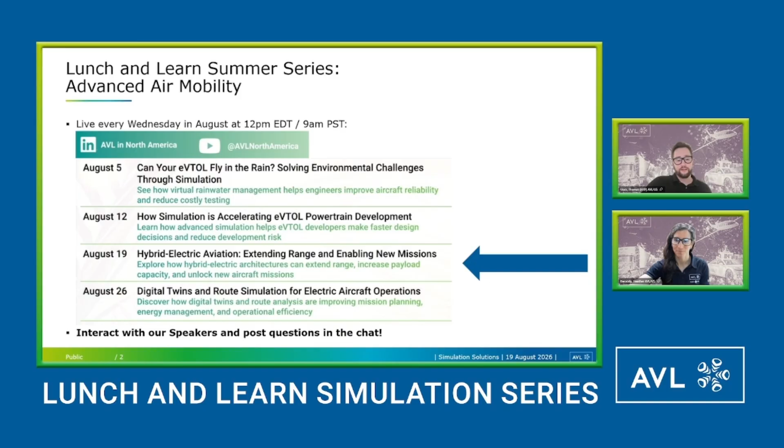When we look into a battery electric aircraft, we put some numbers on the screen. We did some simulations on a mission range study with an aircraft of approximately 3,000 kilograms, with the assumption of having 1,000 kilograms of battery, about a third of the aircraft mass. We can achieve a 30-minute mission with 250 kilowatt hours installed, 160 kilowatt hours usable, to have some spare range for emergencies available.

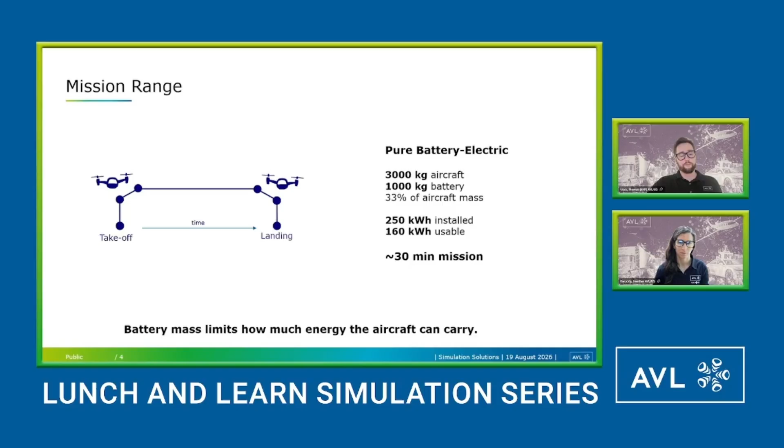And truly the battery limits the range of the electric aircraft, and the battery mass limits how much energy we have available to achieve our mission duration, but also range. So what would happen if we wanted to increase the range? One might say simply, okay, we add more batteries. If we look at this case study, what happens if we increase the battery amount in the aircraft without changing too much else, keeping the architecture intact?

If we hypothetically add 400 kilograms of additional battery, about 40% more battery mass, we can increase the flight duration to 45 minutes. But you might be able to spot the big caveat here. We would only have 100 kilograms of payload left, and that's basically the weight of the pilot. We have no room for cargo or passengers, so obviously this is not going to work very well in practice.

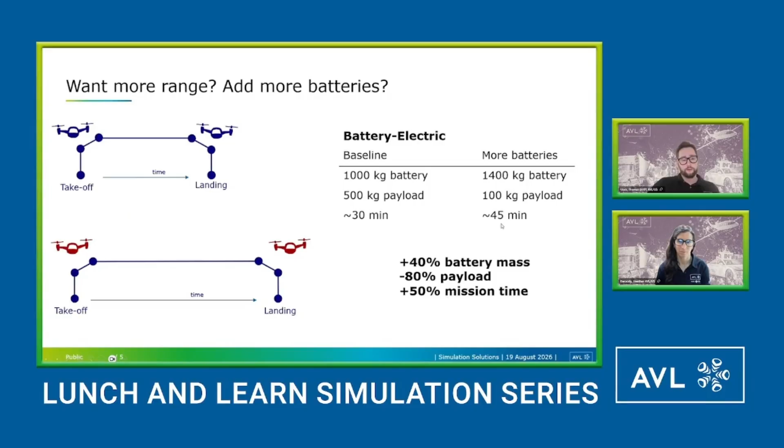So what if we use a hybrid instead to increase our range? Let's assume we shrink the battery down to 200 kilograms. We instead use a range extender, for example, and fuel for that range extender, which might have a mass of approximately 500 kilograms. It still leaves us 500 kilograms for payload, same as the original battery electric aircraft. But this combination would be able to achieve a 200-minute mission.

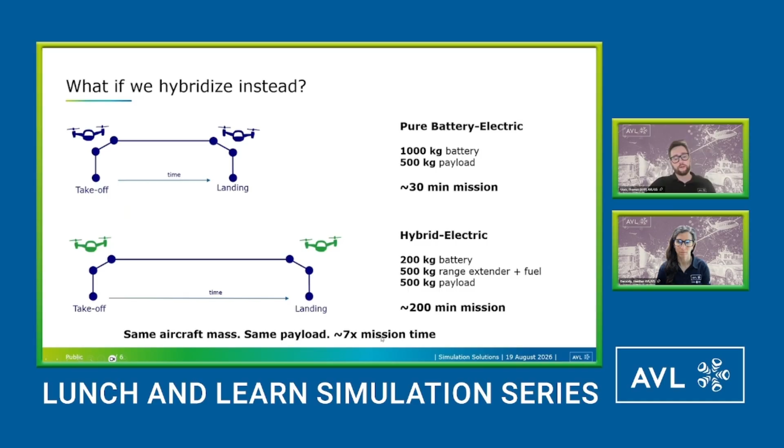So about 7 times more mission time with the same payload, with the same aircraft, basically with the only drawback of adding more complexity to the powertrain system. It will be a more complex system, maybe a more costly development, more parts, but at the same time, this increased capability might benefit you.

So how can we achieve the different powertrain or hybridization concepts? Starting with the all-electric aircraft, we see a schematic where at the center of the aircraft we have the energy storage system, aka the battery in non-aviation terms. The ESS powers the e-motor. The e-motor goes mechanically, the green line, to a propeller shaft, and the propeller or fan, and also powers consumers on board.

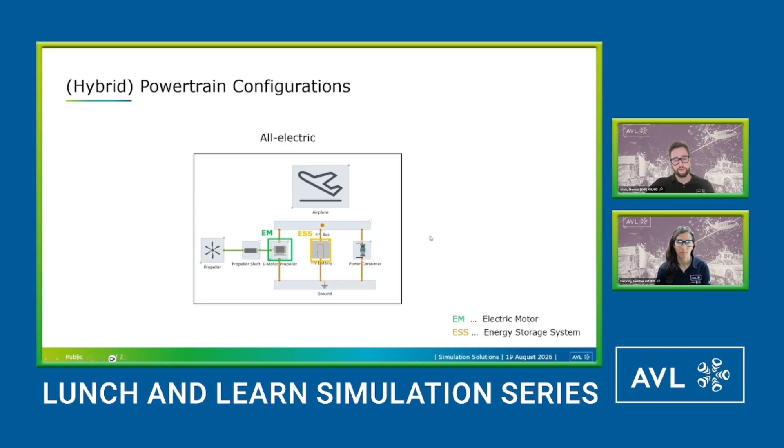Now, if we would like to extend the system and achieve a hybrid configuration, we have a bunch of different options. One ICE-based option might be that we simply add an engine and an electric motor, both mechanically connected to the shaft, mixed through a gearbox, and if it's a true hybrid, both can power the propeller independently.

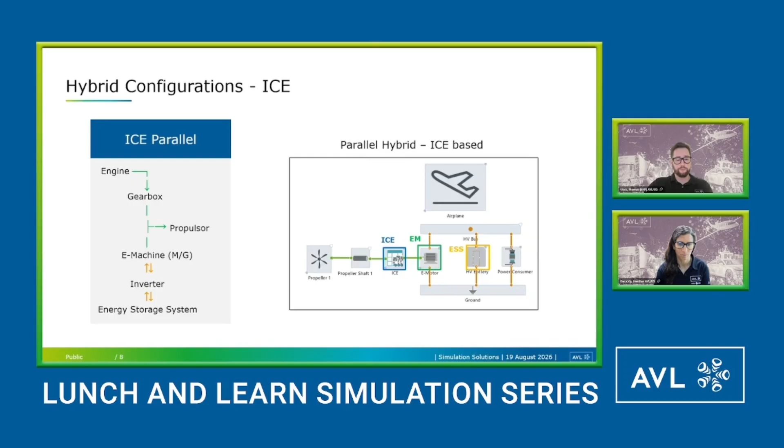Now we could also switch to a series hybrid. The previous one was a parallel hybrid, so both can actually power the aircraft. With the series hybrid, only the electric motor will power the propeller or the fans in the end. And we have different variants of how we could achieve this.

One example would be a fuel cell system that generates the necessary energy, stores it in the energy storage system, the battery, and the system is mechanically disconnected from the e-motor or the propeller, and just electrically powers the e-motor. One might also think, depending on the size of the energy storage system, that this is kind of like a range extender. So the fuel cell system extends the range of the battery, which might be rather small or could potentially be on the larger side.

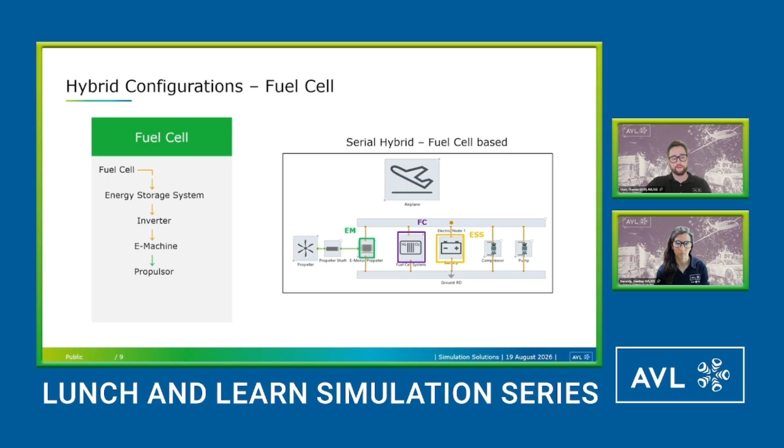So depending on what the use case is. And this can also be achieved with an internal combustion engine or a conventional combustion engine, a turbine potentially as well, where the ICE acts as a range extender. And since the ICE, unlike a fuel cell, doesn't create electric power out of the box, it needs to be paired with a generator. The generator is creating the electricity that's stored in the battery, and then this is powering the electric motors.

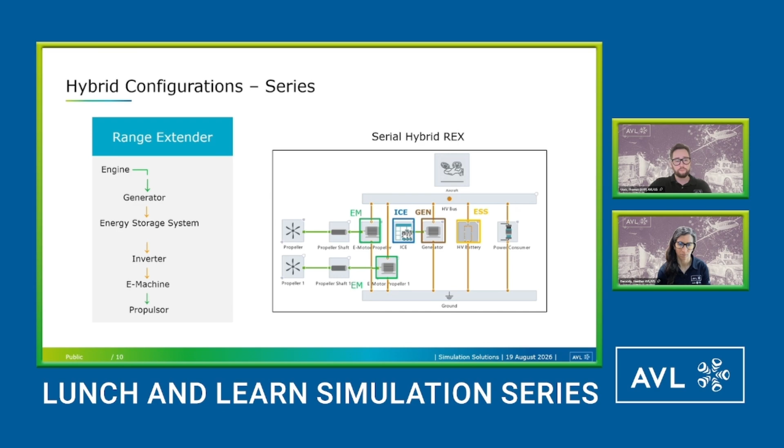But this is not the end of the story. There are even more potential variants. There could be mixed variants, a mixed style hybrid where we would have electric powered propellers, but also a main propeller, for example, that's always ICE powered and that also powers the generator. So here's a layout for such a mixed system.

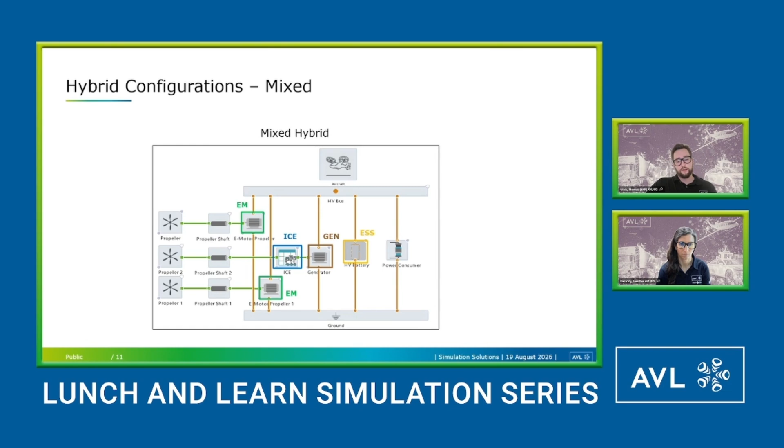And it becomes even more complex when we move on from a conventional aircraft to eVTOL applications, drone applications, advanced air mobility, so to say, where we not only consider basically one dimension, but we might also have the vertical takeoff aspect of it. And again, this really multiplies the potential variants. So we could look at coupled and decoupled systems.

Coupled, basically everything depends on one energy storage system, or decoupled, where, for example, the vertical takeoff e-motors are powered by the battery, and the horizontal propulsion is powered by, for example, a conventional ICE device, let's say it like this. And similarly, we could do parallel hybrid architectures, again vertical and horizontal, for example.

And one can already imagine that the number of potential useful designs multiplies. So that's really a challenging engineering problem, a nice engineering problem to have, and a very nice engineering problem to solve with the help of simulation.

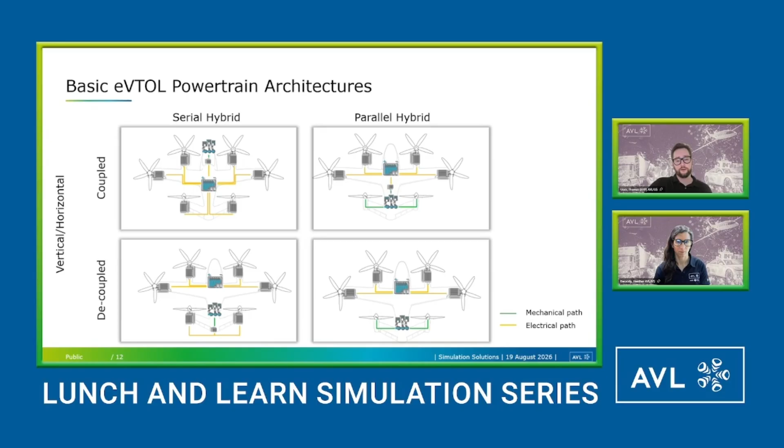To tackle this, what we are doing mainly at that stage of the development is we set up a system simulation model. You see here on the left side a sketch of how we would model the architecture. In this case, it's a cargo drone that we modeled here, a quadcopter layout, to give you an example of such an architecture.

We have to consider the different physical domains. We see in orange here the electric network. We see control functions around here, because we obviously need the control functions, and it's also quite important to have a proper mission definition of the flight route included here.

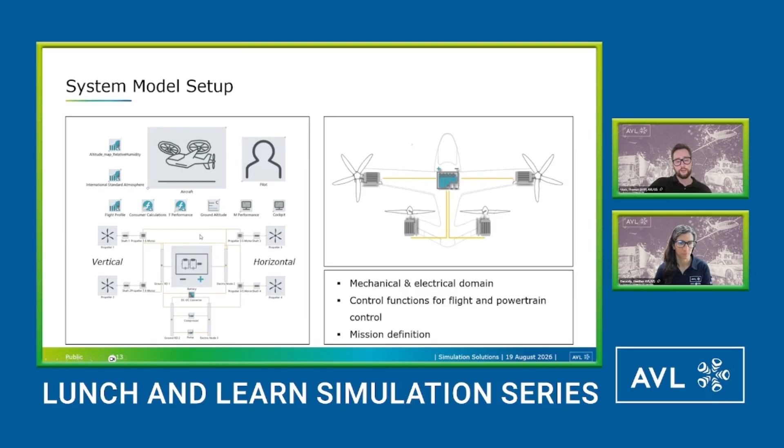And this allows us to run studies like this, as you see here, where we have a flight profile based on altitude and velocity, and the aircraft would simulate this flight route accordingly, and we see live trade-offs of energy flows and power flows, as well as the thermal aspects of the aircraft. Because especially with hybridization and electrification, the components are highly dependent on temperature.

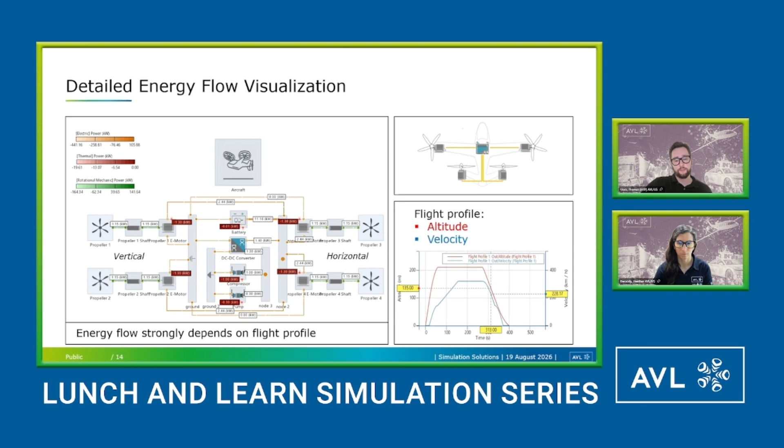The battery's power and capabilities are highly dependent on the temperature. Same goes for fuel cells, which need very defined temperature conditions, and the efficiencies of e-motors and other power electronics components depend on temperature as well. So even for such a simple layout compared to the more complex hybrid powertrains we saw earlier, this multi-domain aspect is very important, and therefore we typically run even these simple systems as a multi-domain type of simulation.

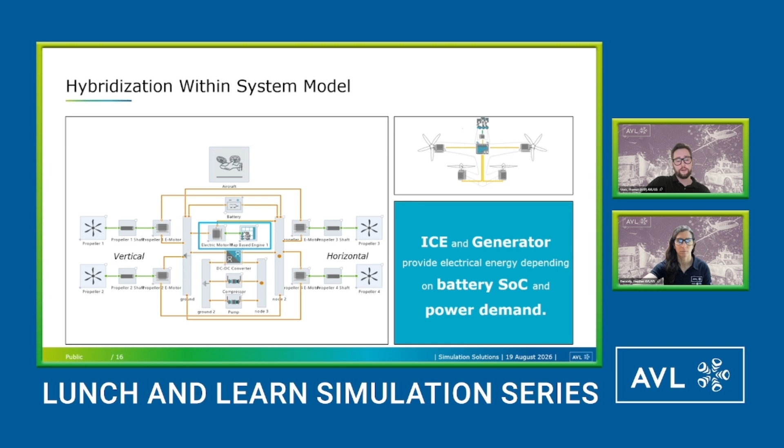Now, to give you an example, because today we speak specifically about hybrids, if we extend this model with an internal combustion engine and the generator, as you see on the sketch here, it makes the operation of the aircraft much more interesting, as we now need to balance when the ICE is kicking in, when the battery is empty, when it is charging again, and how the thermal management system is behaving.

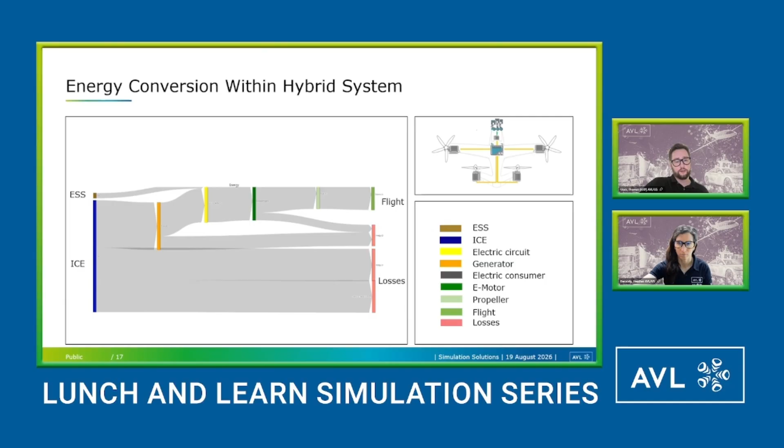And the simulation allows us, again live during the run or afterwards, to analyze the different energy conversions within the system, and in the long run optimize the operating strategy of the entire hybrid system.

But to give you a real, let's say, practical insight, much better than the slides I showed here, Heather has prepared an actual example of a fuel cell electric aircraft, and I would hand over the screen to you.

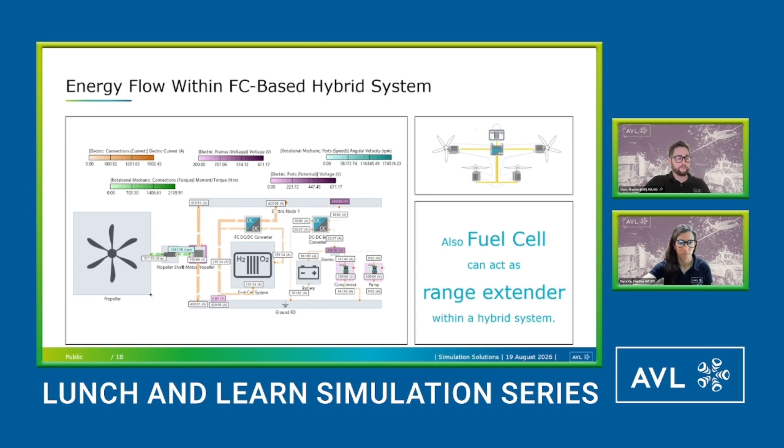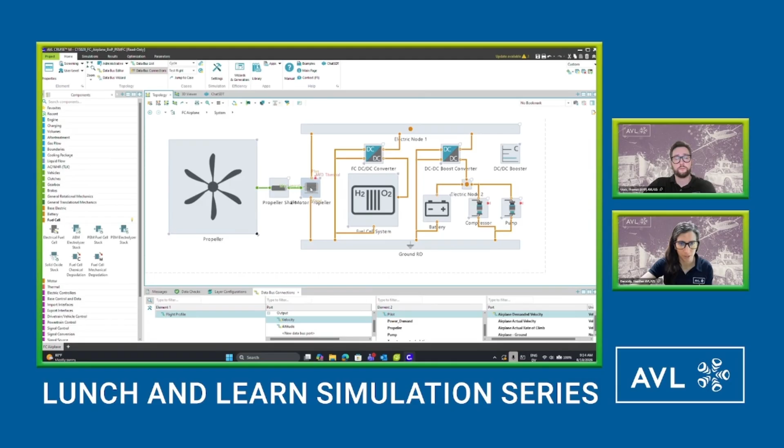And yeah, so now I've jumped into CRUISE here with the very similar structure, and we're looking at, again, the fuel cell and battery hybrid. So jumping quick, we can define our airplane here, and we have our pilot that we put all our inputs for how they're controlling the aircraft. And again, we can define different flight profiles that show what the inputs are, but more interesting, we have our system here. So again, we have the fuel cell, the battery, and this one is showing the series combination with the propeller and the e-motor.

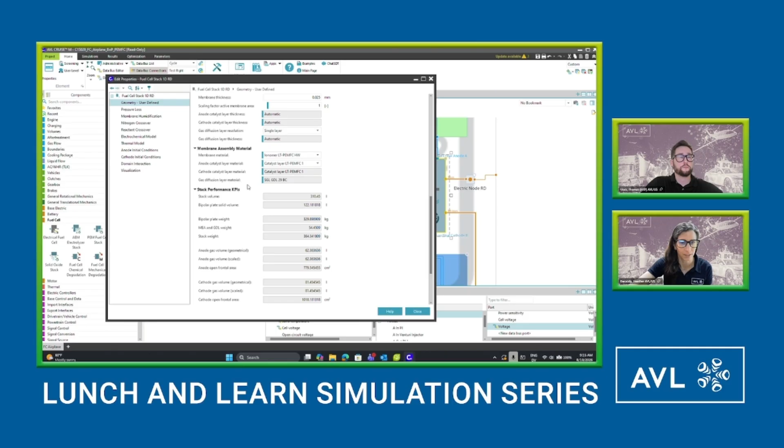We can jump here into the fuel cell, and this is our stack model here, where we can define the different geometries of the stack, how many cells you have, and you really can dive down to the specifics of different catalyst layer materials and gas diffusion materials, and really go deep there. We can look on, this is the anode side here, where we have our hydrogen, and here we see our water separator. So we have a water tank that pulls out the water to dehumidify it.

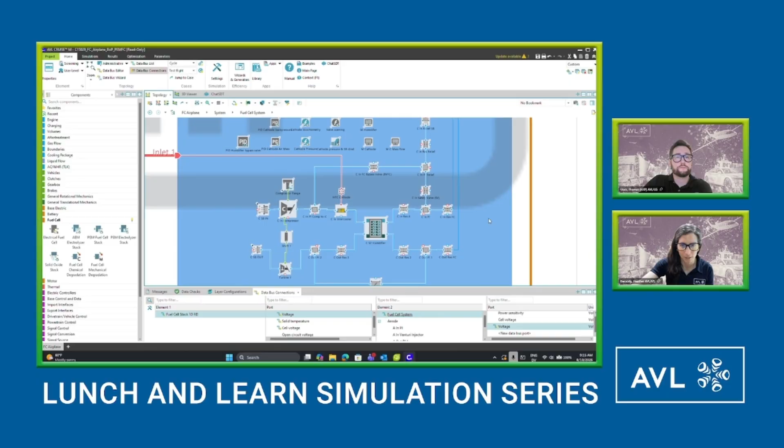And we can jump over to even the cathode side. This cathode side is showing our air intake and humidification system with all the different pipes. And then looking even deeper, we have in this pink section the thermal management system here. So this is your coolant with different heat exchangers. And so you really can see that you can go quite into detail about which systems you want to add.

And even so, we can jump to and run a simulation. And with all that, it does run quite quickly. Once it starts, we can see it's faster than real time. We can see different gauge instruments, and this can all be, of course, catered to what you're interested in focusing on, your specific engineering question. So I can just stop it and we can jump to the results tab. And we can see different metrics that you're interested in.

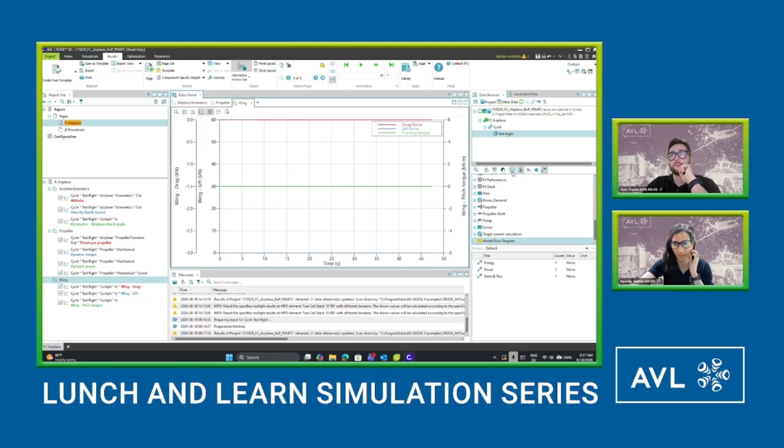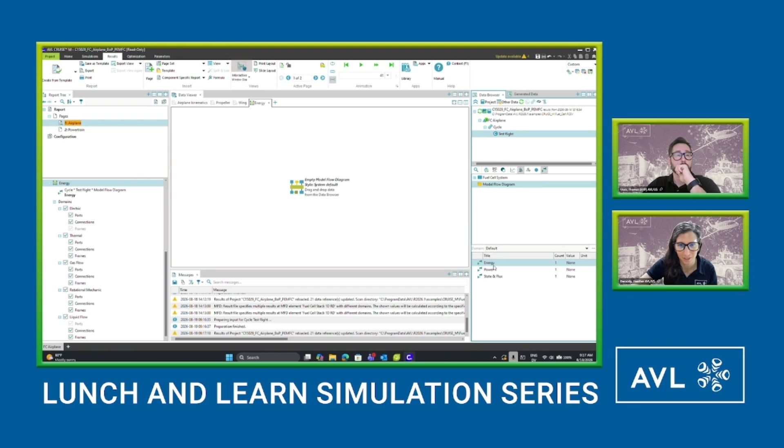And the energy flow diagram, we can pull up, all our results are over here, any metric you want to see. But the energy flow diagram is pretty cool to see, so I think it's worth pulling up. It's just as easy as dragging and dropping, and you can click what you want to see. We can play, and it'll play the different diagrams. I only ran it for a pretty short amount of time, so there's this, and we can see power.

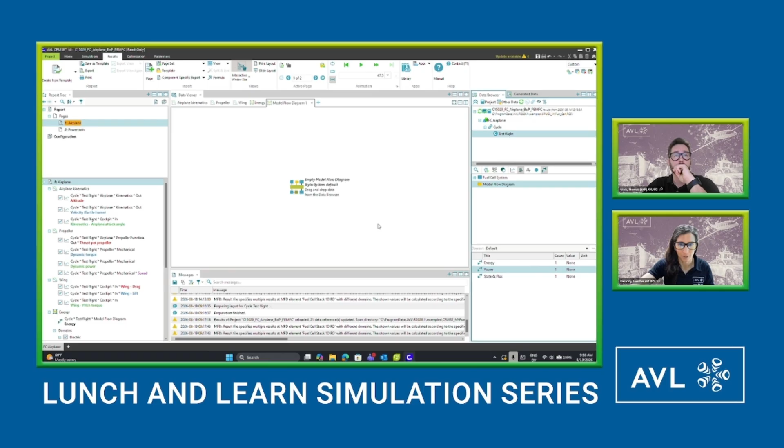Yeah, so that was quite a quick crash course on the fuel cell, but you can see that you really can dive into any amount of detail, expand it, add humidifiers, and throw in the chat any questions, but I can give the screen back to Thomas.

Yeah, maybe just stay a bit here because I think it's quite impressive how detailed you can actually go on the component level while still being real-time capable, or even faster. I would say at some point the system model here, if you detail the fuel cell model a little bit more, turns into a fuel cell model with an aircraft around it. Let's say if you're even more interested in certain degradation aspects of the fuel cell, or the same could be done for the battery if the battery is more in the focus. These types of models really give you a lot of flexibility.

And Heather, you showed today the single calculation run or the live run. But obviously, one other option to operate these models is to compare different variants, different parameters in an automatized way, and you would typically run many simulations in parallel, depending on your computational power. A workstation maybe something like 100 simulation models at a time or overnight, and you can compare all different kinds of sizing options, maybe also different flight profiles, different use cases, so you can get a really good understanding if the design that you're developing will achieve the necessary targets.

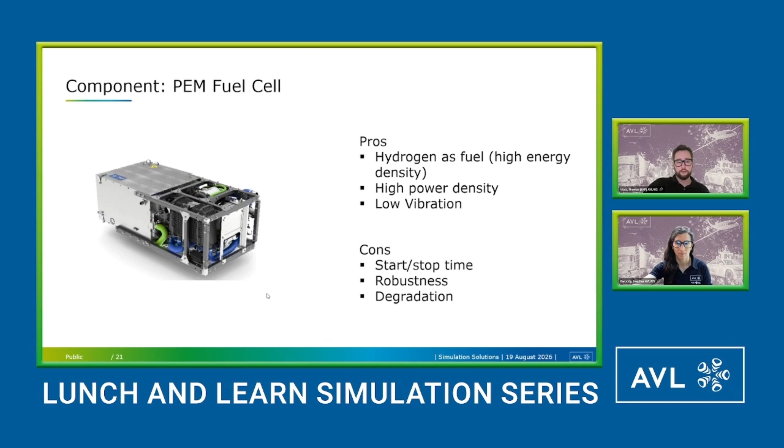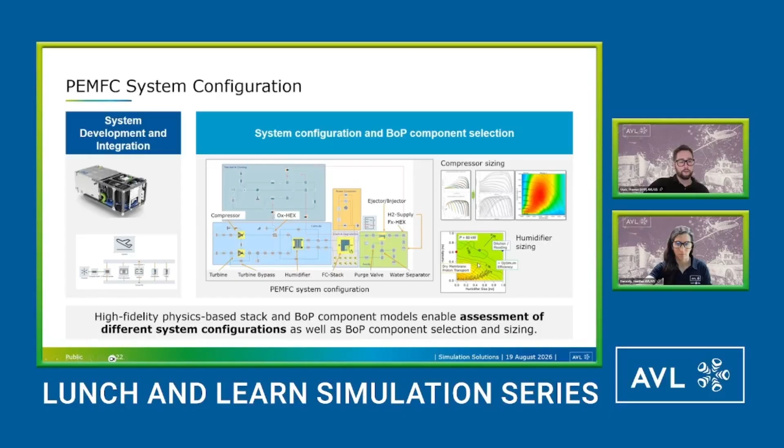And just moving on. So some of the use cases you would see then in the end. You would use such a model potentially for compressor sizing, for sizing of balance of plant components. As I mentioned also, to develop the control strategy of the entire system, so of the subsystem, but also then the broader system where thermal management would be included, which obviously is very important for the range.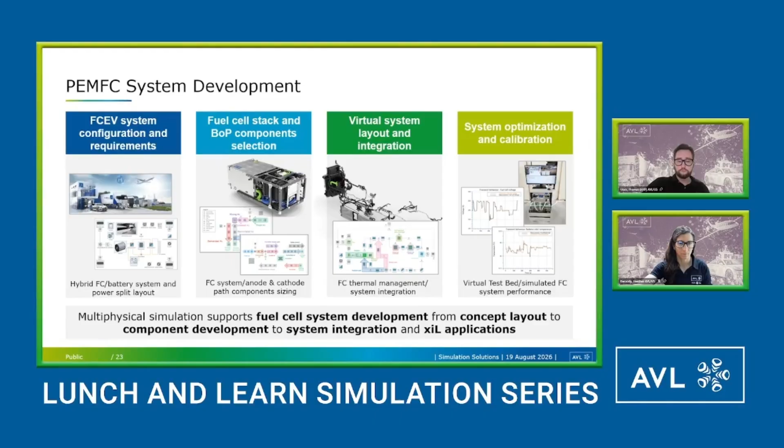And looking even deeper into the component development, today we've been on the system level side for the majority of the time, so we can go maybe to a very coarse 3D in AVL Cruise M that Heather showed. But if it needs to go deeper, we also would look into 3D CFD simulations. So here you see a couple of images that were done in AVL Fire M on fuel cell designs.

And here it would really go into the depth of the component development and, for example, the exact channel layout, flow patterns in the cooling channels and the bipolar plates as well. The supply and pressure losses of cooling fluid, but also the media supply, and also the detailed thermal management of the stack.

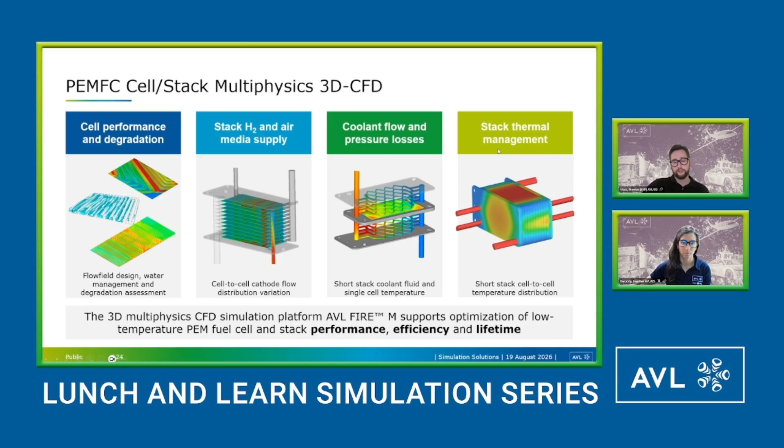Besides fuel cells, obviously there's also other interesting applications. So rotary engines are quite interesting for drone applications, certainly VTOLs potentially as well, because they're quite compact. They're also very smooth running in terms of vibrations, and quiet also. So if an aircraft needs to hover and stay long in the air and circle, this is quite an interesting concept. On the downside, the efficiency overall is not that great.

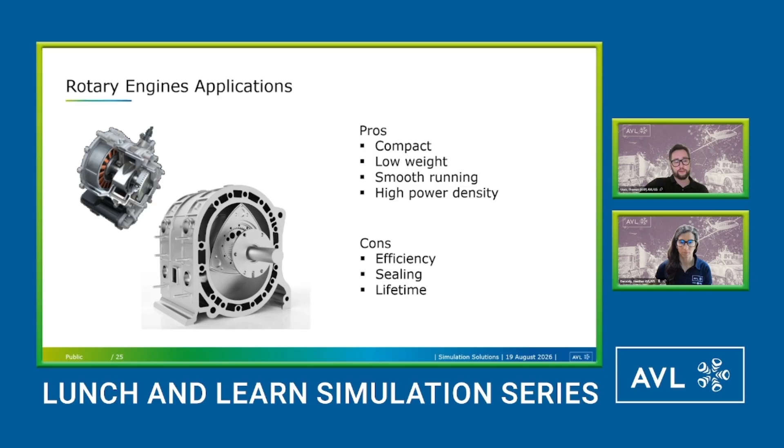So hybridization is really key for a rotary engine as well. There might be some sealing issues, or it's a challenge, let's say like that. And then also the lifetime of the engine might be a con, but maybe not for every application as important.

The rotary engine, we have a long history of simulating it, but also recently it's fully available again in our modern simulation technology. So in AVL Cruise M and Fire M, the M series that Heather demonstrated, and also the coupling of 3D CFD and the 0D/1D system simulation is a big simulation topic for us here.

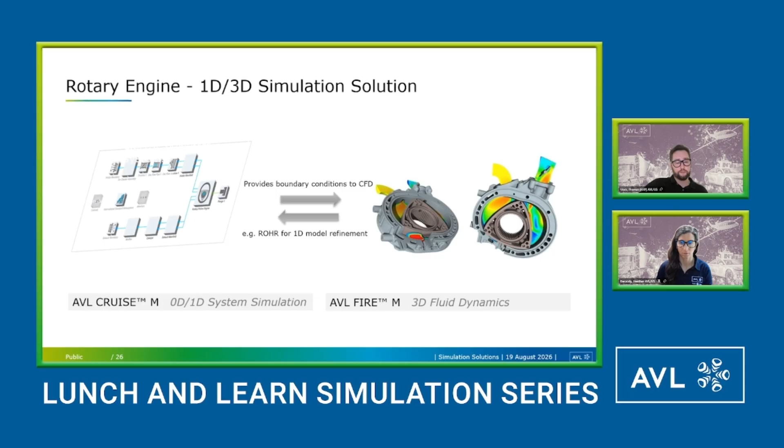Here you see one quick case study where we would pair the two different simulation domains. We would simulate in more detail the rotary engine and then use simulation results, for example directly the combustion profile, as you see here, for the rate of heat release in our Cruise M system simulation model. And we can route back different intake or exhaust conditions to the 3D and run this in a paired, iterative loop, let's say it like this.

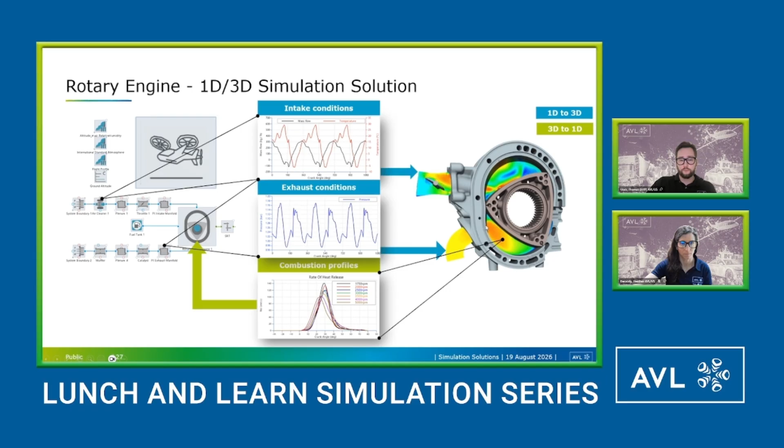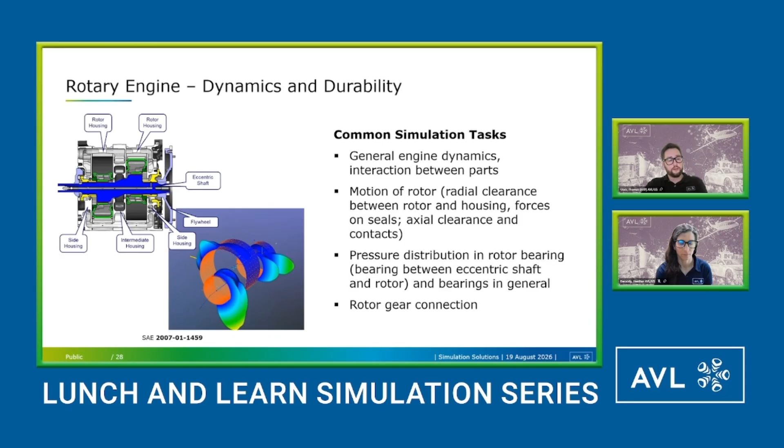And also in terms of vibrations and lubrication, we can look at this. So AVL Excite is a very good tool to investigate any NVH and durability topics.

And that brings me pretty much right in time to the end of today's session. I hope you received a nice overview of some of the challenges of hybridization and also some of the simulation capabilities that would help you tackle this. Pure battery electric clearly might show some mission limitations, but there are good hybrid approaches out there that can help. And I think simulation can help a lot in dealing with the additional complexities of such a hybrid system.